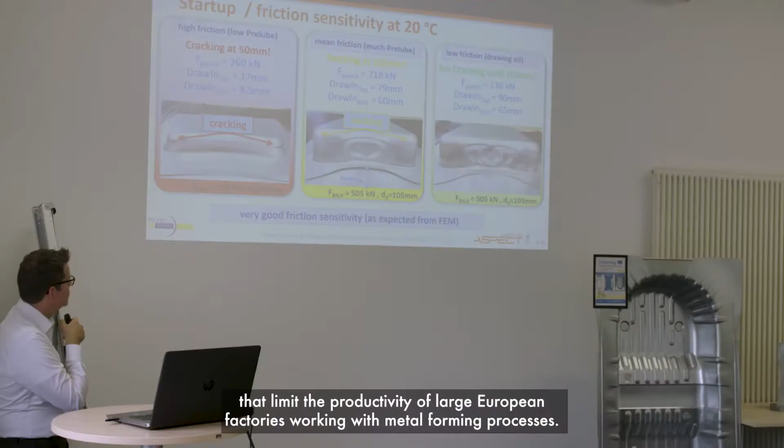In the Interreg Northwest Europe Project ASPECT, a consortium of 14 partners work to address the production issues that limit the productivity of large European factories working with metal forming processes. In these processes, friction and lubrication play a key role in reducing defects to achieve high-quality products.

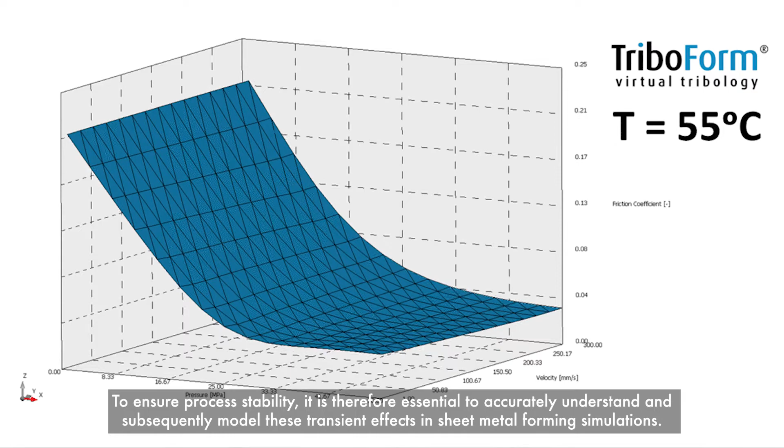The heating up of the tools at the start of the production can influence the tribological conditions substantially, and to ensure process stability, it's therefore essential to accurately understand and subsequently model these transient effects in sheet metal forming simulations.

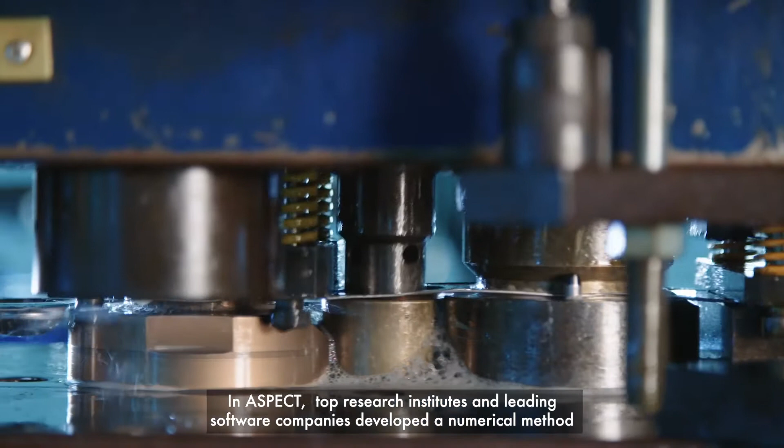In ASPECT, top research institutes and leading software companies developed a numerical method to predict the temperature-dependent friction effects during sheet metal forming. This game-changing innovation has been applied in 2 industrial processes for automotive and consumer goods production.

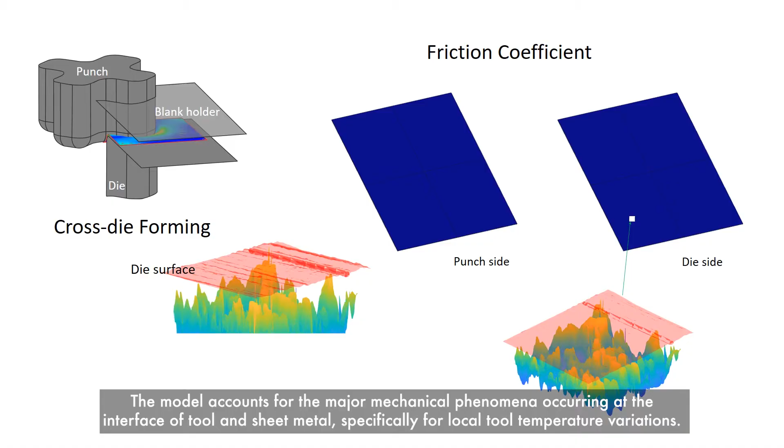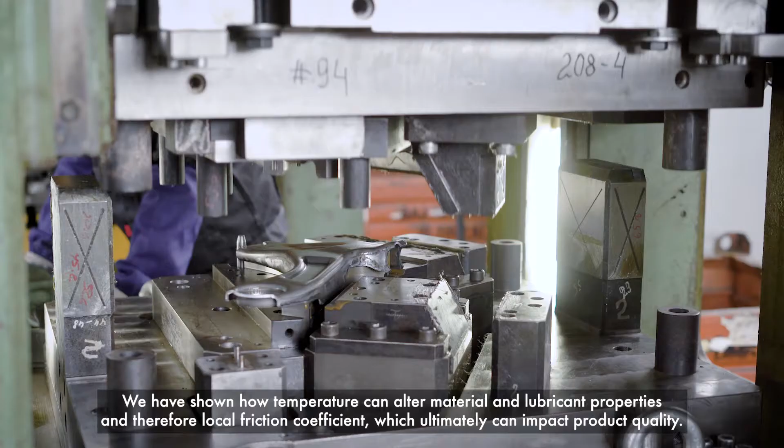In ASPECT, we developed a multi-scale friction model for sheet metal forming applications. The model accounts for the major mechanical phenomena occurring at the interface of tool and sheet metal, specifically for local tool temperature variations. We have shown how temperature can alter material and lubricant properties and therefore local friction coefficient, which ultimately can impact the product quality.

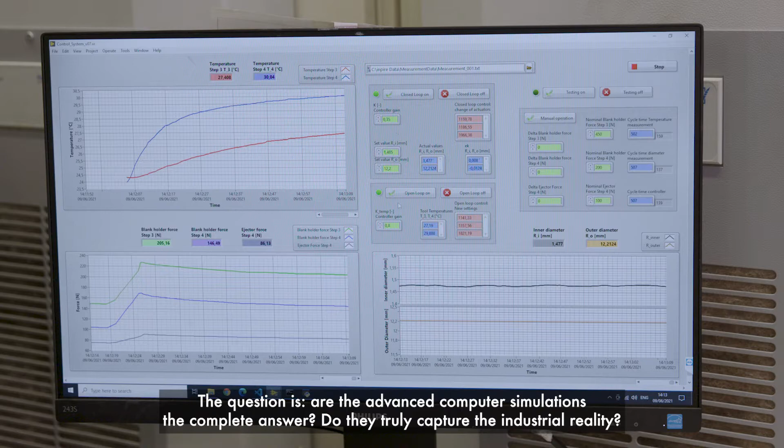The question is, are the advanced computer simulations the complete answer? Do they truly capture the industrial reality?

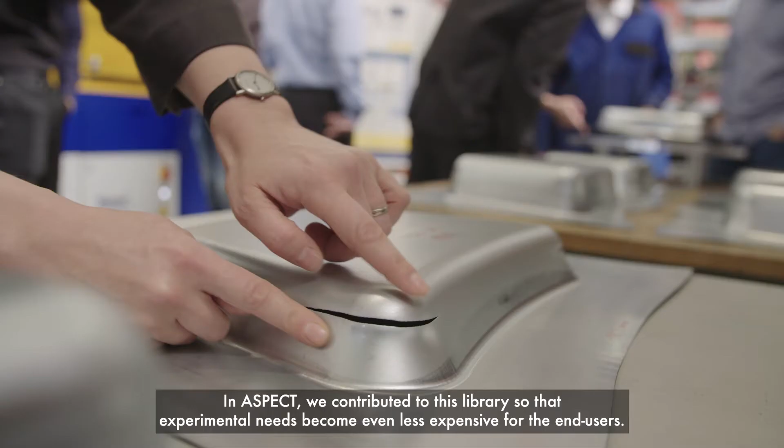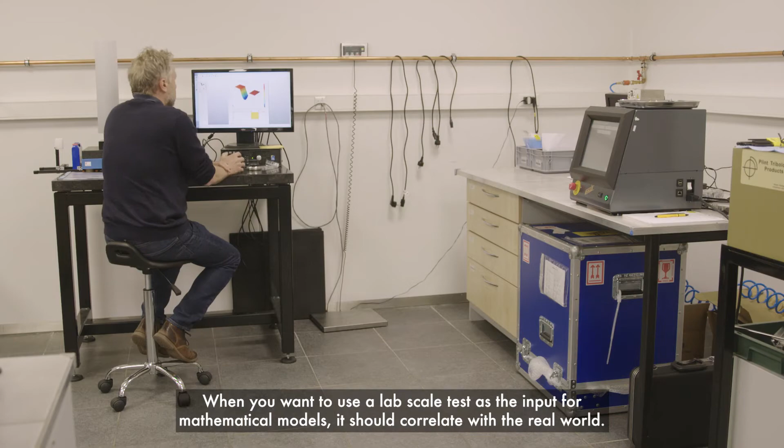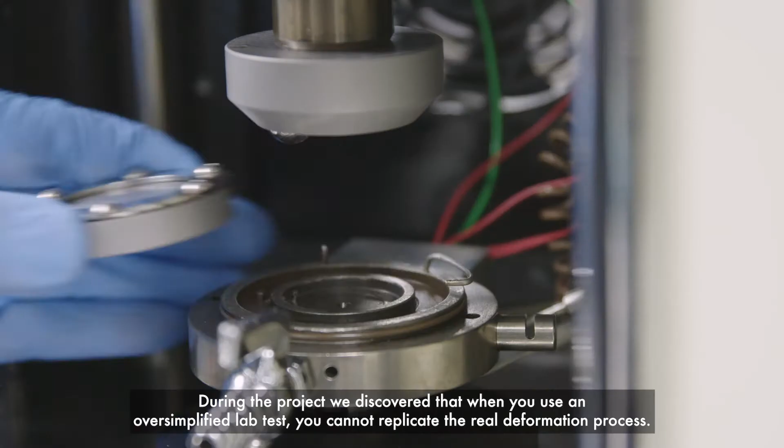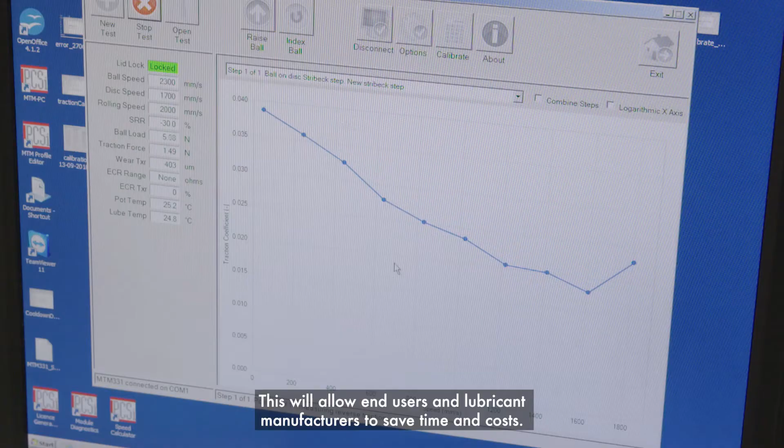Are the current experimental methods sufficient to complement the input to the physics-based models? When you want to use a lab-scale test as the input for mathematical models, it should correlate with the real world. During the project we discovered that when you use an oversimplified lab test, you cannot replicate the real deformation process. And by understanding the actual mechanism, it was possible to develop a new lab method that accurately predicts the behavior during sheet forming. And this will allow end users and lubricant manufacturers to save time and costs.

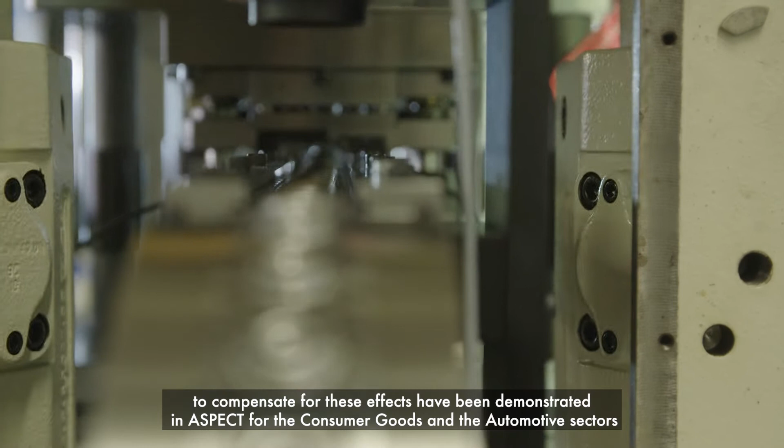The numerical method to predict temperature-induced effects on the product quality, together with the automated control system to compensate for these effects, have been demonstrated in ASPECT for the consumer goods and the automotive sectors. The next step is to transfer this knowledge to other processes within and beyond these sectors.

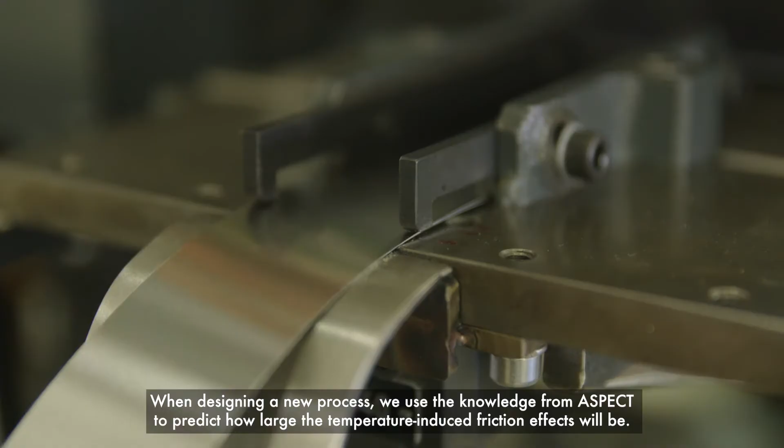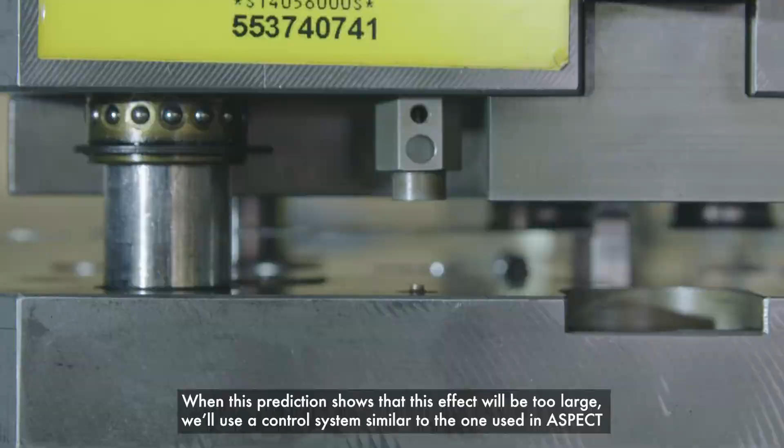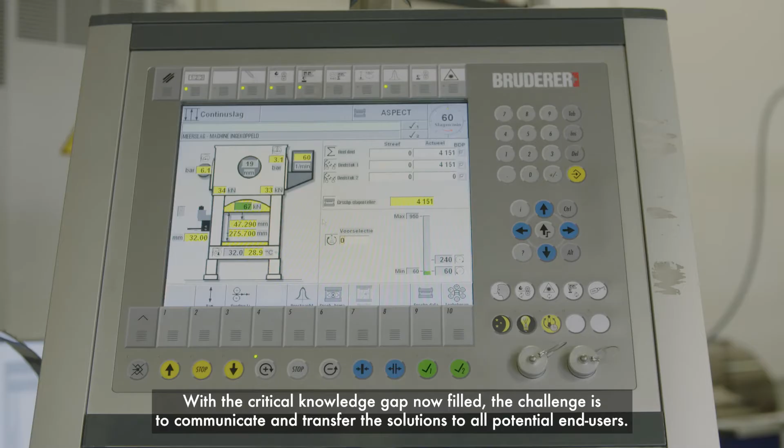With the critical knowledge gap now filled, the challenge is to communicate and transfer the solutions to all potential end users.

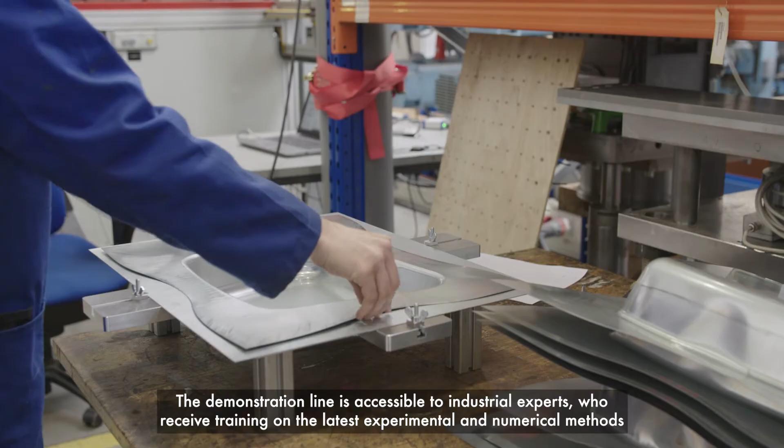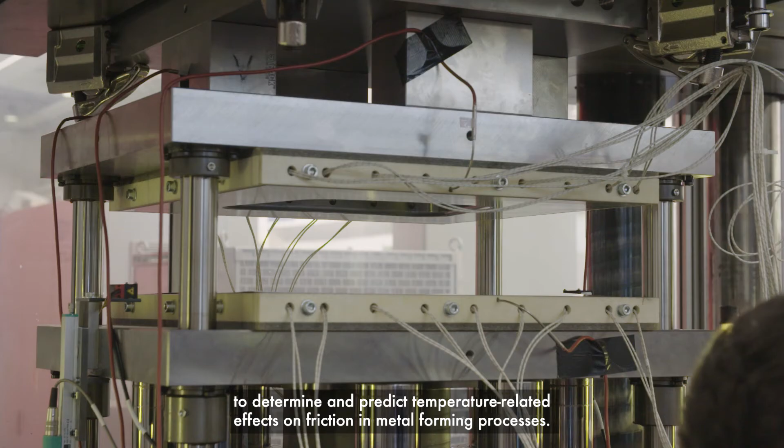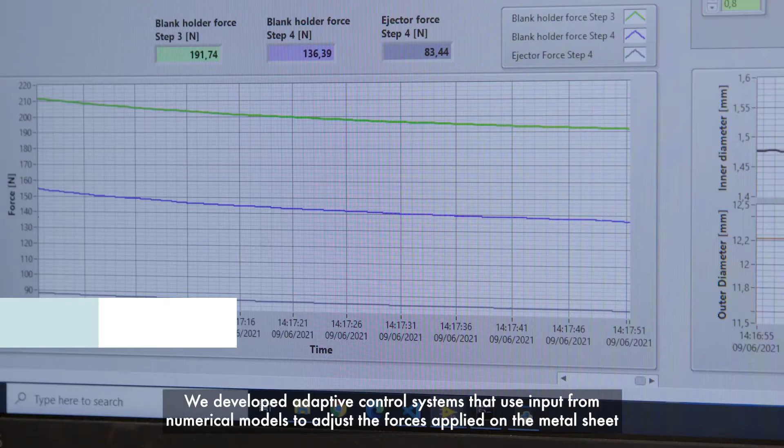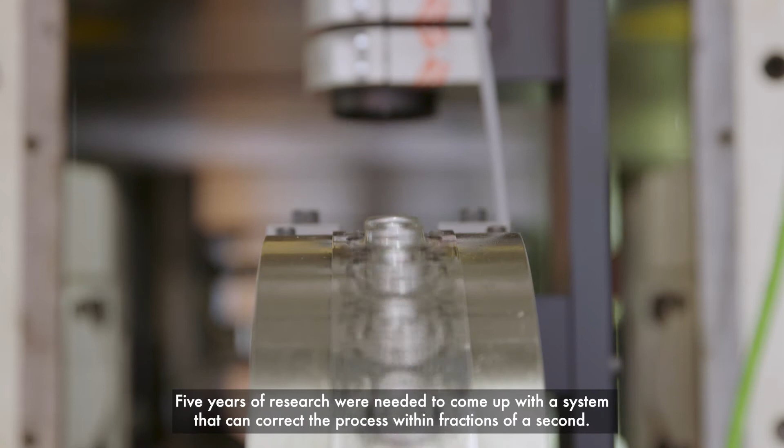But how is the prediction linked with the control during the process? We developed adaptive control systems that use input from numerical models to adjust the forces applied on the metal sheets and thus compensate friction changes and other parameters to keep the process within the desired process window. 5 years of research were required to come up with a reliable system like this that can correct the process within fractions of a second.

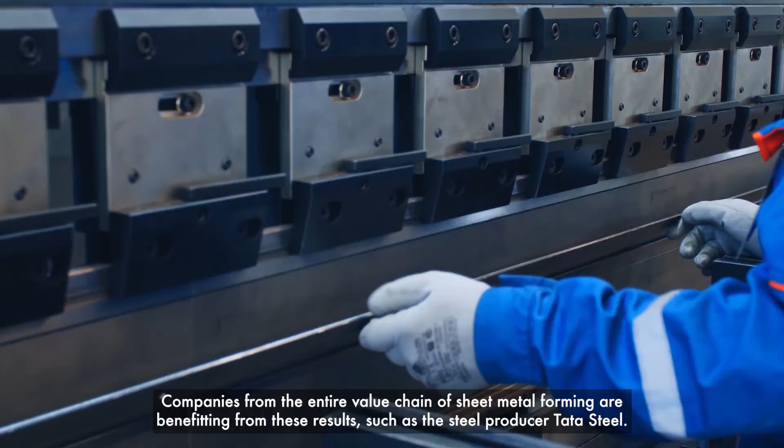The impact of ASPECT is not only limited to end users. Companies from the entire value chain of sheet metal forming are benefiting from these results, such as the steel producer Tata Steel. In ASPECT, we gained valuable insight into the tribological behavior of our materials, and that enables us to do better customer support and in the long run even develop better products with better coatings.

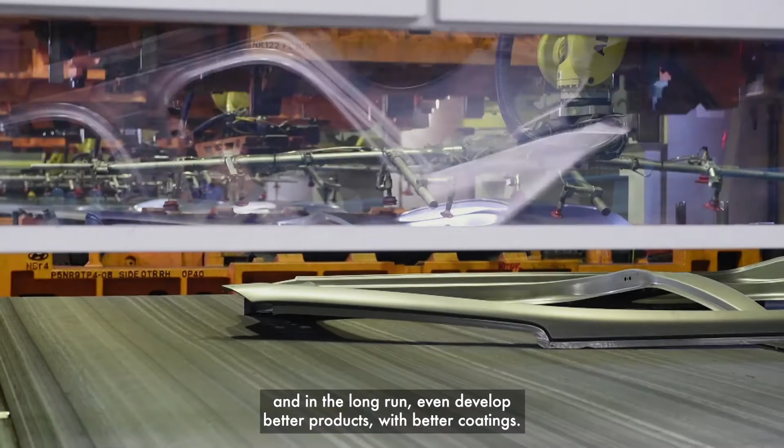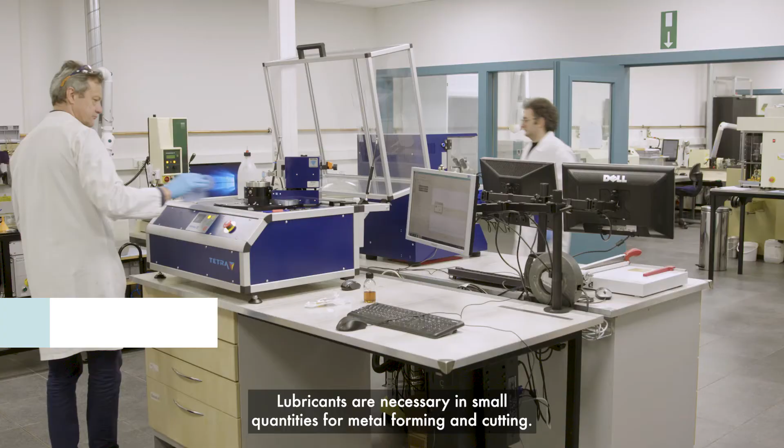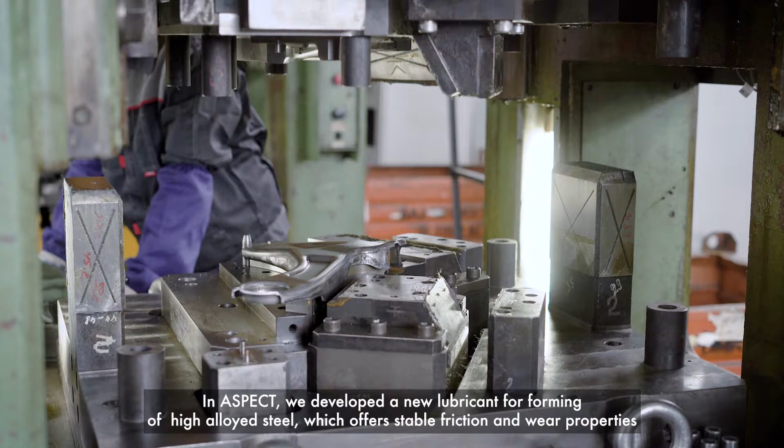And of course, we cannot discuss tribology without considering lubricants. Lubricants are necessary in small quantities for forming and cutting. They can help to control the friction and temperature during the process. In ASPECT, we developed a new lubricant for forming high alloy steel. This offers stable friction and wear properties with rising tool temperature in the process. And this is according to the main goal, process stability.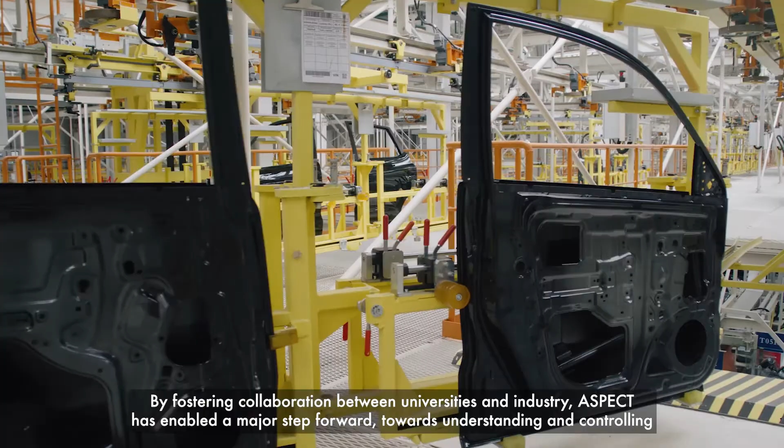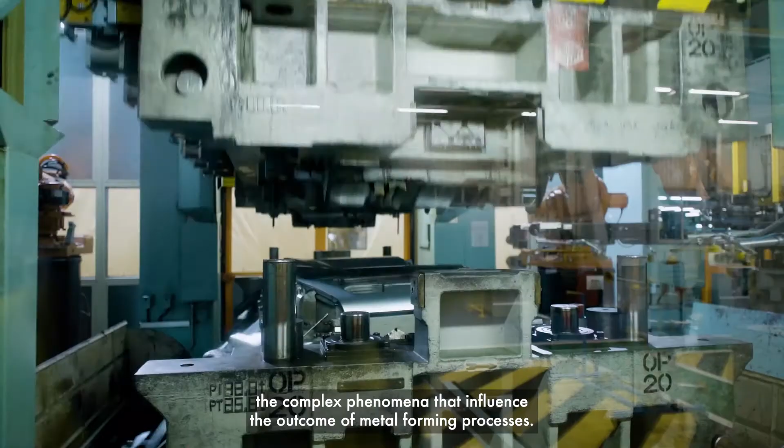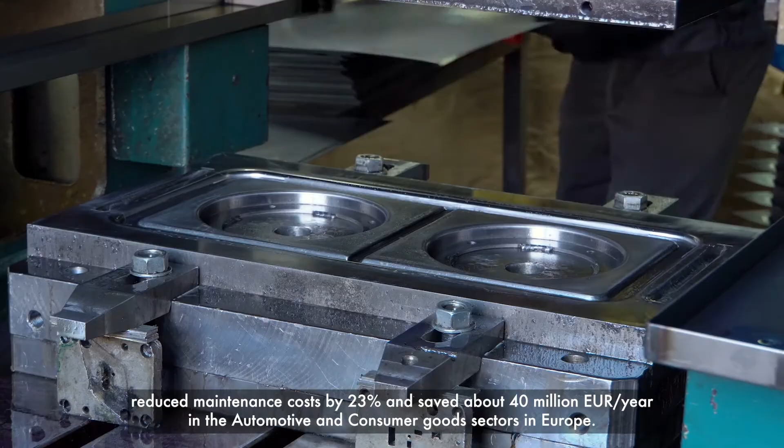By fostering collaboration between universities and industry, ASPECT has enabled a major step forward towards understanding and controlling the complex phenomena that influence the outcome of metal forming processes. By addressing the root cause of the technical failures causing production shutdown, ASPECT has enhanced the productivity of the considered processes by 35%, reduced maintenance costs by 23%, and saved about €40 million a year in the automotive and consumer goods sectors in Europe.